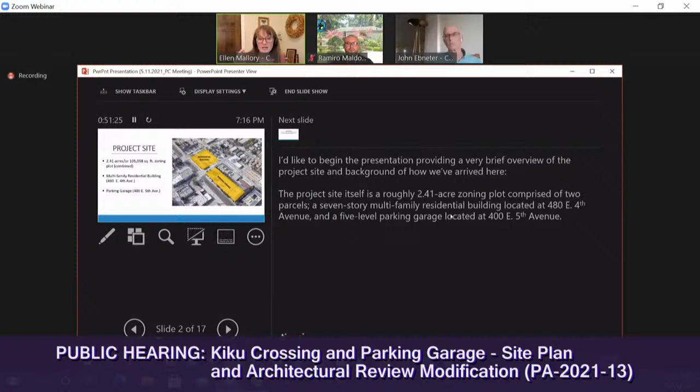Thank you, Philip, would you like to take over? Sure, can you hear me? Yes, we can. Good evening, Chair Mallory and the rest of the Planning Commission. Before I begin, I just want to make note that this is going to be a joint effort presentation with staff and the applicant team. Philip, can I stop you for a moment? Yeah, we have your notes, there we go, thank you.

Okay, are you seeing the presentation slide? We are seeing the presentation now. Okay, thanks, sorry for the confusion. I wanted to just go over the overview of the project site and background and how we've arrived here.

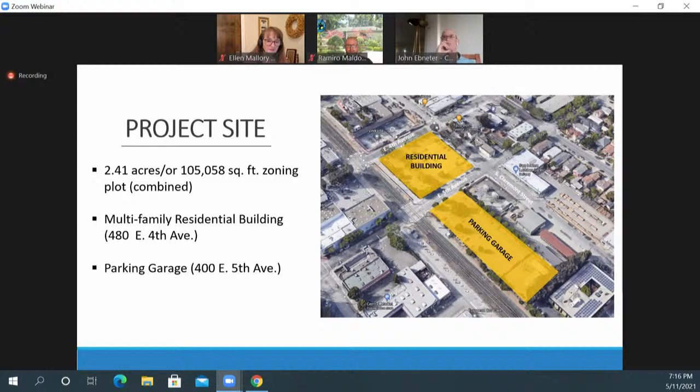The project site itself is a roughly 2.4 acre zoning plot comprised of 2 parcels. A 7-story multifamily residential building is to be located at 480 East 4th Avenue, and a 5-level parking garage is to be located at 400 East 5th Avenue.

The SPAR modification brought to you today revises some of the design aspects of the original entitlement previously known as the city-owned downtown affordable housing and parking garage sites project, which was approved by the City Council in August of last year. Please note the multifamily development is now formally known as Kiku Crossing.

In preparation for the building permit submittal, MidPen Housing identified site constraints requiring design modifications to avoid conflicts with existing and proposed utilities, as well as to ensure adherence to their design standards and in response to best practices in affordable housing financing requirements. I did want to make note that a previous SPAR modification was approved back in November 2020. The design modifications affected only the parking garage structure.

The scope of this proposed SPAR modification includes several revisions from the originally approved design, which are summarized here. These changes affect both the multifamily residential building and the parking garage. The project design team has prepared a brief presentation that will walk you through these changes on the next few slides. I did want to make note that this SPAR modification includes amendments to the originally approved conditions of approval, as well as some new additional conditions, which I'll touch on before concluding the presentation.

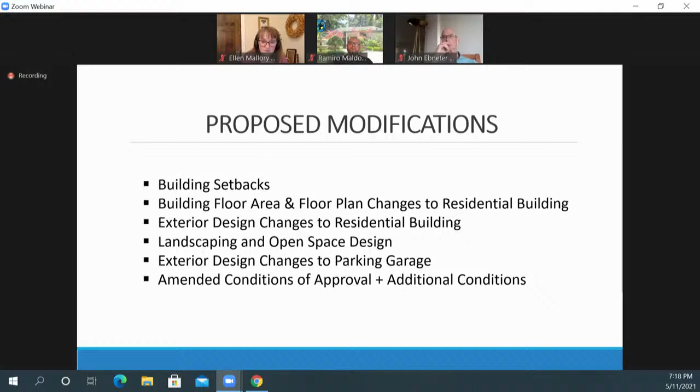Thank you, Philip. Good evening, Chair Mallory and Commissioners. Thank you for meeting with us this evening. My name is Mollie Naber, and I'm Associate Director at MidPen Housing. I've managed the Kiku Crossing workforce housing and the 5th Avenue public parking development over the past 3 years for Mid-Penn. Before discussing some minor modifications to the entitled design, I want to just give you a brief update on project status.

Us at Mid-Penn, as well as a very talented team at the city, have been busy preparing to start construction at the end of the year. On the design front, we've completed 3 rounds of rigorous third-party value analysis, plus an interdepartmental city review of the garage design in preparation for submitting building permits next month in June.

On the community engagement front, we've done quite a bit of work. We received over 120 proposals for public art on the garage and worked with 2 local high school art classes and the Civic Arts Committee to select finalists. The city also led the way separately, securing approval from other redevelopment agency successor entities to develop the land as proposed. And we explored Peninsula Clean Energy subsidy and technical assistance options for green features.

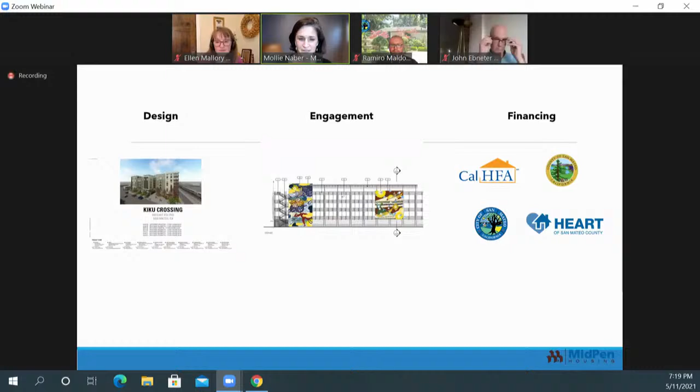On the financing front, we also have good news to share. We are awarded additional county and state funding and are currently competing for our final source of funds, state bonds and tax credits. Next slide, please.

Now I'd like to walk you through 7 slides illustrating these minor modifications to the building design. First, we've reduced the overall building mass by about 22,000 square feet. We were able to achieve this reduction by reducing corridor sizes to MidPen standard 5-foot width, modifying average unit sizes, removing a full second bath in 3-bedroom units so that the 3-bedroom units now have 1.5 baths instead of 2 bathrooms, and eliminating the fitness room on the 7th floor.

Not all the changes were reductions. We also increased the number of 2-bedroom units, so large family units, by 6, and just decrease the 1-bedroom and studio unit count by the same amount so that the overall unit count of 225 homes is unchanged. Our open space also increased, namely in the interior courtyard and the landscape buffer between the building and the public sidewalk. Next slide, please.

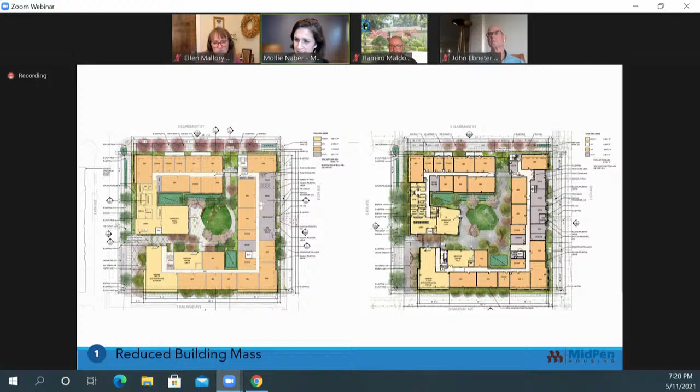Utility constraints, as Mr. Brennan mentioned, were an impetus for this reduction, namely achieving occupational health and safety clearance from the existing high voltage lines on the 4th Avenue side, needing clearance for scaffolding for construction and also window washing equipment to keep the building clean over the long run. This resulted in a slight setback increase on the 4th Avenue side. We also needed to allow more space within the site footprint for the many new utility boxes required for this all-electric high-density development, resulting in a slight building setback increase on the 5th Avenue side. Next slide, please.

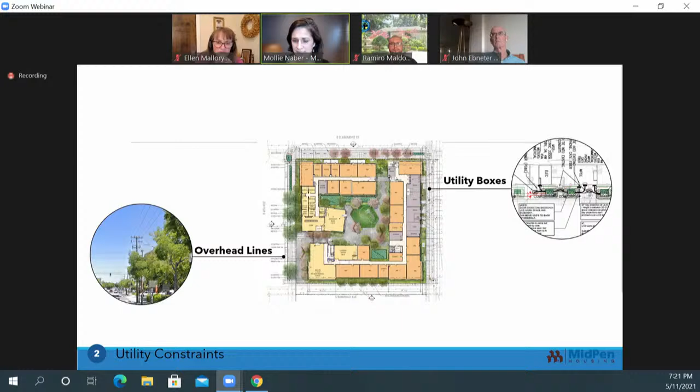Here you can see the revised 3-bedroom unit layout with 2 bathroom sinks, 2 toilets, and 1 shower bath instead of 2 shower baths. The average number of occupants in 3-bedroom units in Mid-Penn, San Mateo City County communities is about 4.5 persons. And based on MidPen's experience developing and managing more than 8,000 homes throughout the Bay Area, we believe that 1.5 bathrooms in 3-bedroom units with this average occupancy that we expect in San Mateo delivers an appropriate level of service. And also, importantly, ensures that this project is competitive for state funding and can get built hopefully starting end of this year. Next slide, please.

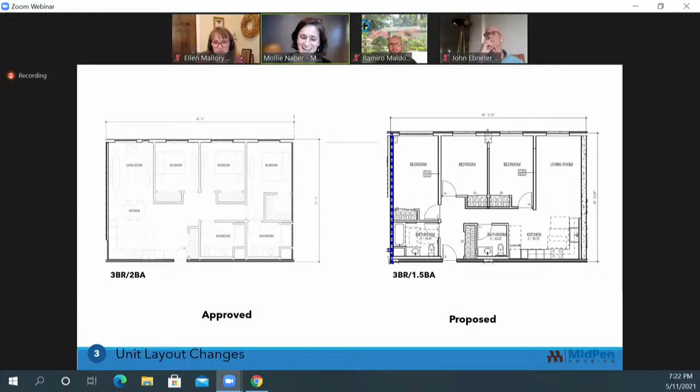The primary driver of eliminating the 7th floor fitness room was actually acoustical. Throughout the design process, working with our acoustical engineer, we realized that due to the units below the 7th floor amenity, the room could only be used for stretching, so no equipment, no free weights, et cetera. In consultation with my colleagues in property management at Redwood Services, we realized that a stretching room would be really an underutilized amenity at this family property, and so we eliminated that.

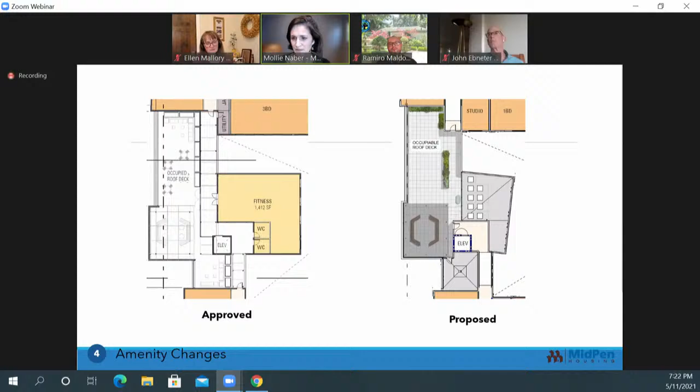Next slide, please. These adjustments to the interior layouts necessitated some minor adjustments to the exterior elevations. As you can see here, you have to look really close to see the changes. Some might say that it looks better. The material palette did not change.

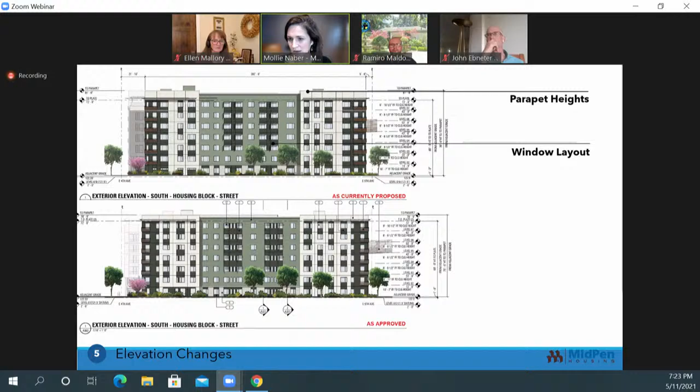I want to call your attention to something that did change in a slightly more discernible way, and that's the parapet height. Parapets are low protective walls along the edge of the roof, installed so that people working on top of the roof, such as repairmen for the solar photovoltaic panels, have fall protection as required by OSHA. With this parapet height adjustment, the building height remains within the allowable limit. Next slide, please.

You may remember from our original entitlement hearing in August that there was some discussion around the cornice design, so we worked to detail that out. The cornices are steel structures that will break down the building height, while importantly here, for logistics, allowing space for the ropes that future window washers and exterior building maintenance personnel will use to connect to platforms that they can access from the ground floor and then be pulled up to wash the exterior of the building. Next slide, please.

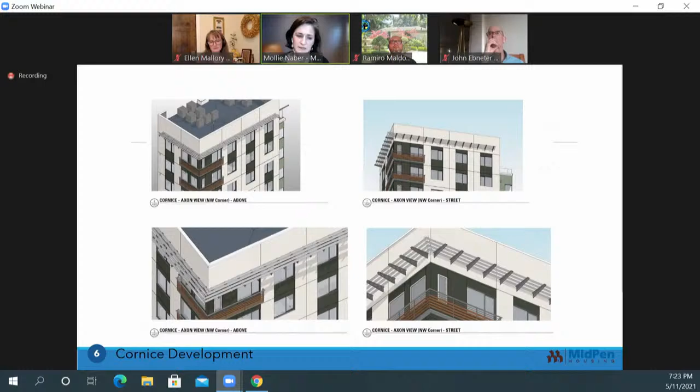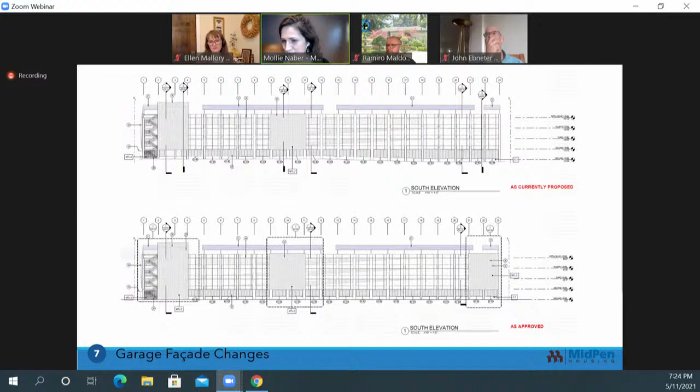Going across the street to the garage, there has been a slight modification to the garage facade. This came out of our review with city departments of a design development set. One of the 3 panels featuring public art was eliminated to minimize the risk of graffiti and other damage from the garage interior. To minimize that risk, we are now placing solid walls behind each artistic panel, and as a result, one panel had to be eliminated to ensure we still achieved adequate permeability so the garage could breathe and avoid mechanical ventilation. The panel being removed is the one furthest from public view, and the one that would be primarily viewed by passengers on Caltrain riding past this garage.

Next slide, please. If you're curious about the name Kiku Crossing, I have a blurb explaining it here on the thank you slide, and I do thank you for your attention. I'm joined by Jan Lindenthal, the Chief Real Estate Development Officer at MidPen, as well as Cynthia Strawn, our project architect from BAR Architects, to answer any questions, and I'll turn it back over to Mr. Brennan.

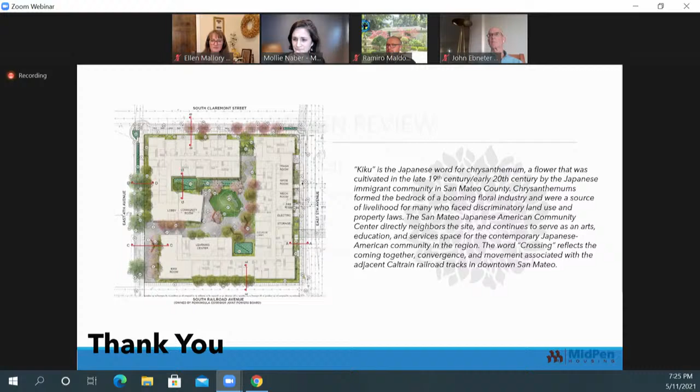Great, thank you. The design changes were formally reviewed by Larry Cannon of Cannon Design Group. Mr. Cannon provided no recommendations for changes other than suggesting a few alternative cornice design options that could be explored. Staff's view is that the proposed modifications are consistent with the originally approved design intent and remain compliant with all the required findings, policies, and code requirements. Additionally, given the discussed constraints, staff believes the revised cornice design responds to the Planning Commission's guidance to provide added robustness and dimensionality.

As mentioned earlier in the presentation, this SPAR modification includes amendments to previously approved conditions, as well as a few new conditions. The amendments can be summarized as providing added specificity, clarity, and technical information to the previously approved conditions. As for the new additional conditions, conditions 1 and 2 are standard conditions from our Parks and Recreation department that were missed with the original entitlement. Condition number 3 is a new condition from our Public Works department requiring the applicant to show compliance on the building permit plans with required clearances between existing utilities and utility boxes. A track changes draft of the amended conditions is provided in attachment 6 of the administrative report, and the new conditions can be found in attachment 1 as exhibit B of the draft resolution. Staff is prepared to discuss any of the noted conditions in detail should the Planning Commission desire to.

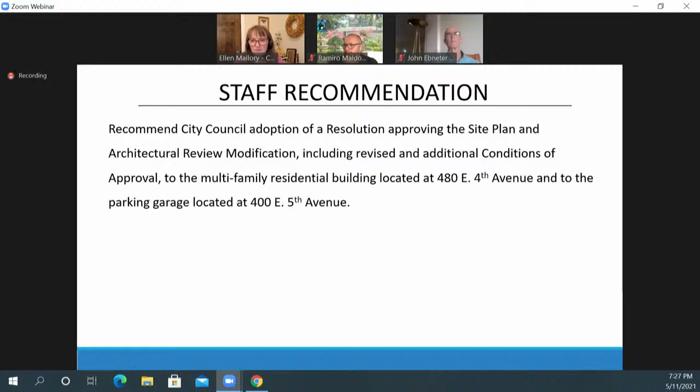Staff is recommending that the Planning Commission recommend to City Council approval of the proposed SPAR modifications, including the revised and additional conditions of approval. Please note that this application is scheduled to go before the City Council next week on May 17th. That concludes staff's presentation. I'm happy to answer any questions from the Commission.

I did want to make note that a public comment was submitted after delivery of the agenda packets to the Planning Commissioners. Staff is prepared to discuss the comments should the Planning Commission want to.

Thank you, Philip, and thank you, Mollie, for your presentation as well. Why don't we start off by going to Commissioner questions, then we can open it up to public comment, and then we'll circle back for Commissioner comments.

So since there's three of us, Ramiro, would you like to start first with any questions? I have no questions at the moment. I would like to hear the public's comments, and then I might have questions thereafter.

John, do you have any comments or any questions? I do not have any questions, but I do need people to know that I did meet with the applicant last week via Zoom and reviewed the project at that time. Thank you.

I just have one comment, and I also met with the applicant via Zoom last week. After we met, I got to thinking some more, and the topic was about the window washing, which was an issue with the cornice and having the ropes go down through the slat openings.

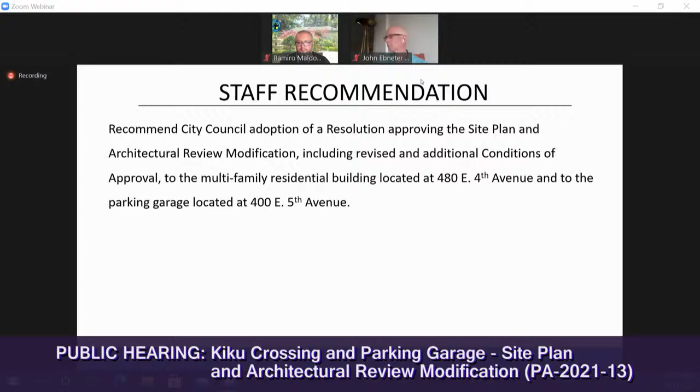Thank you, Chair Mallory. My name is Julia Klein, Acting Planning Manager, and I do have a few announcements to make. One of the first things to mention, we did receive a submission from Commissioner Mike Etheridge regarding his resignation. As far as we know, the resignation is effective immediately, and we're looking to encourage everybody to spread the word in case you know others that may be interested in the position. It's a volunteer position, and if there are others interested, they can contact Patrice Olds, the city clerk.

Additionally, I want to mention we have upcoming Planning Commission meetings. I'll go through the agendized items and request confirmation from the commission to make sure we have a quorum. The first meeting, on Tuesday, May 25th, is the next meeting coming up. Currently there are no items at this time, and we'll confirm that with a cancellation notice later this week, so Mary will send that out. Next up would be Tuesday, June 8th, which also has no agendized items at this time.